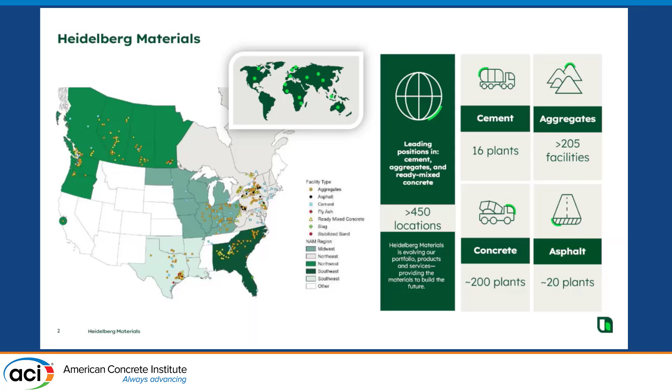And like a lot of companies out there, we have published a series of sustainability commitments. And we've grouped those into a number of different key categories. Having a safe and inclusive workspace, being nature positive with actions around biodiversity and returning some of our aggregate quarries to community assets in the future, looking at circular economy and resiliency principles, recycling concrete aggregate, looking at use of waste materials from the steel industry for slag, coal industry for fly ash, etc. And then the big one for us is net zero and actions to reduce our carbon footprint.

And because of our net zero commitments, we've published what we call our concrete promises, some of which are highlighted here on the screen, which were revealed about a year and a half ago at our Capital Markets Day. And some of the key ones that I generally highlight is that 50% of our revenue will be sustainable revenue by 2030. And sustainable revenue for us means meeting certain criteria in terms of how low carbon it is, how much recycled concrete material is being incorporated.

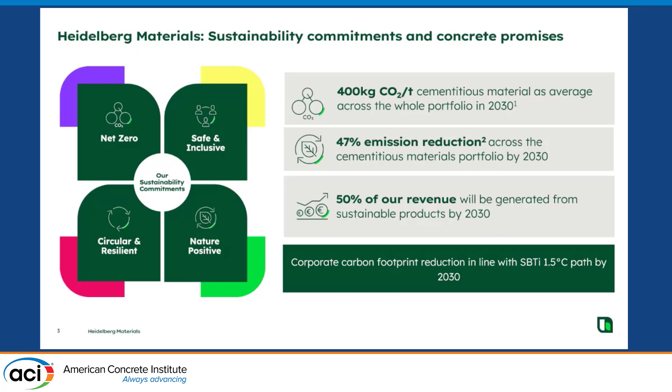And then the other one is that top number, which is we commit to reducing our carbon intensity of cement to 400 kilograms of CO2 per ton. So many of you are probably familiar with the old rule of thumb that 1 ton of cement equals 1 ton of carbon. We're trying to get down to 400. And for some context, the lowest EPD that we have for a straight cement product in North America is at our Delta, British Columbia cement facility, where we're at 679 kilograms of CO2 per ton. So quite a ways to go to get to that 400. That is a global number, so some countries are going to be pulling a little bit heavier than others, but nevertheless, we have a ways to go to get there.

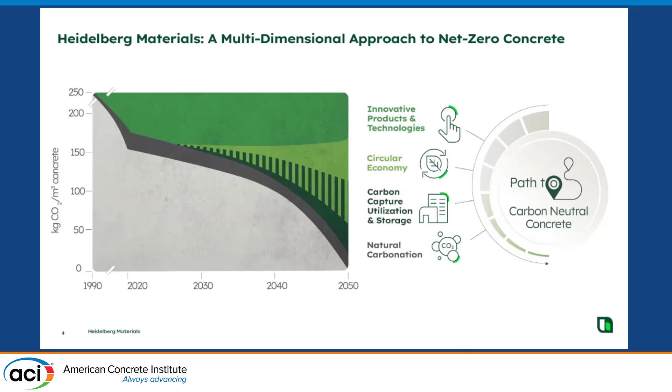And Rob Cooney is going to be going over a little bit of what the industry's action plan is to get to the goal of net zero concrete. And we're aligned with that as a member of the Cement Association of Canada. But we also have our own roadmap that's very similar, but we group it slightly differently in terms of where we're focusing our attention to help drive down to that goal of net zero. Those 4 buckets are innovative products and technologies, the circular economy, carbon capture utilization and storage, which I'm going to be focusing most of the talk on here today, and then the concept of natural carbonation. And many of these solutions are available today.

On the innovative products and technology side of the equation, we have Portland limestone cements. We brand them as EcoCem in North America. We also have blended cement products. Our EcoCem Plus product is a PLC with 20% fly ash already blended in it, coming right from the cement plant. Those are contributing relatively significantly to reducing the emissions associated with the cement product.

We're also utilizing alternative lower carbon fuels. So across Canada, cement facilities have started to implement alternative fuel programs where they're allowed to use construction demolition waste, wood waste, non-recyclable plastics, other waste streams, depending on the region. And this has a pretty significant impact on the carbon intensity of cement as well. Our British Columbia plant is already utilizing 20 to 30% substitution of these materials, and our goal is to get to 50% substitution across all of our plants in North America.

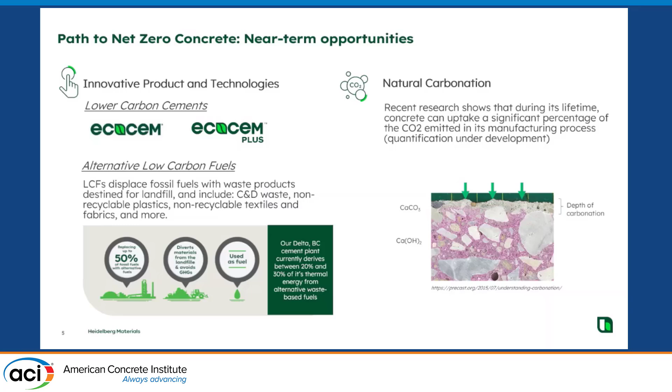And then the other one that's happening now is natural carbonation, and I think it was a subject on a number of the different talks going on here today at ACI. I'm not going to get into the nitty-gritty here because it can be controversial about what it exactly means, but there are efforts underway to better quantify in a conservative manner what the impact of natural carbonation is, and we'll start to see that reflected better on our LCAs and our EPDs at some point in the future.

And that brings us to the final product, concrete. And today there are a lot of different levers that are available for low carbon concrete. And again, it's been covered pretty well here at ACI with the various sessions that are going on. But ultimately we have a number of different levers at our disposal as concrete producers to demonstrate carbon reductions. Whether it's looking at our aggregate gradations and getting better particle packing and strength out of the skeleton of our concrete mixes, looking at different admixture products to help with water reduction and strength enhancing properties.

The big one, of course, is SCMs. Everyone's very familiar with the use of fly ash or slag to reduce the amount of cement that's going into the mixes. Cement types like Portland limestone cement. Days to strength maturity is a big lever for us, being able to extend a mix from 28 days to 56 days to 91 days. Those are tremendous levers for significantly reducing the carbon impact of concrete.

And there are some new digital solutions as well, like maturity monitoring technology or in-truck monitors or probes that sit in the drum of the truck and create different feedback loops for how that concrete's performing, so that based on the given climate temperatures of the day or the actual mix that's going out the door, you can get that feedback loop and make incremental improvements to your concrete mix as you optimize towards carbon reductions.

And right now, you can pretty comfortably deliver about 30 to 50% carbon reductions using an EPD when compared against the regional industry average benchmarks, if there are no limitations in place. If you just had a slab that you're going to pour that nobody's ever going to stand on, you could pour a very low carbon concrete slab.

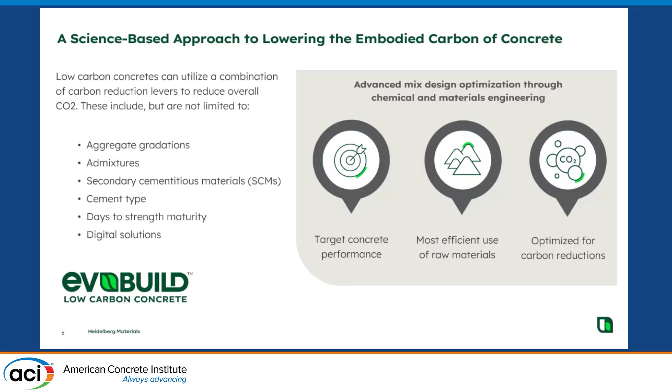Unfortunately, when we get into construction, there are lots of limitations that get put in place, whether it's workability, pumpability, finishability, or schedule. You need higher strength concretes to make your suspended slabs when you're doing high-rise construction, and that does not fall in line with our carbon reduction efforts. So there's a lot more to be done to be able to deliver the deep carbon reductions that we're all chasing as an industry. And we have to look to the future to be able to deliver those carbon reductions.

And where Heidelberg Materials is concerned, where we're really making significant investments in trying to demonstrate a leadership position, is in the future with carbon capture, utilization, and storage technologies. So another one of our concrete promises that we've put out to the marketplace is that we hope to capture 10 megatons of carbon cumulatively by the year 2030. And we're going to do that by constructing a number of CCUS plants or CCS plants without the utilization component.

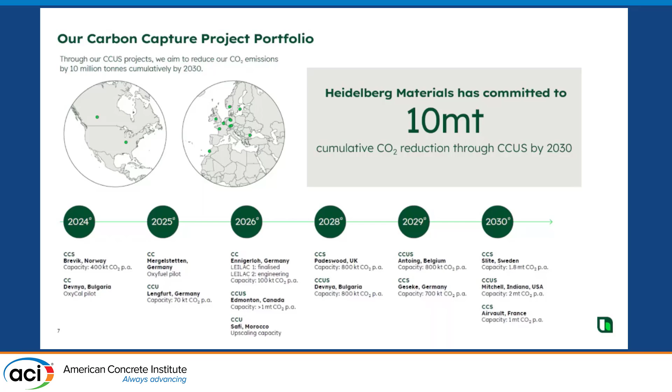There's a number that are highlighted on the screen. Many of them are located in Europe, in Germany, the UK, France. The first one that's going to go online later this year, within the next month or so, is in Brevik, Norway. So we're very excited about that in the near term. And then longer term, we have a couple of solutions or plants that we're targeting to have in North America as well. One in Edmonton, Alberta, which I'm going to focus on a little more deeply in subsequent slides, and then another one down the line in the 2030 time frame for Mitchell, Indiana.

And that brings me to our Edmonton project that's been publicly announced, and we're working hard at getting it over the finish line to be able to break ground on construction. This project is going to capture 1 megaton of carbon annually once it's fully online. Ideally, it's going to be completed by 2029. There are two main barriers to being able to go forward with CCUS. One of them is cost. It takes a tremendous amount of cost to be able to build one of these facilities. What we quoted when this plant was first announced was $1.4 billion in 2023.

And as we know, costs have only gone down since 2023, so we're going to be able to go forward with this hopefully soon. But kidding aside, there's a lot of uncertainty out there right now, but we do have funding secured with the federal government, with the provincial government. It's something that we're hoping to make our final investment decision on in the near future, and then be able to break ground and deliver this solution to North America.

One of the questions we get all the time is, why Edmonton? Why would you put a carbon capture plant in Edmonton? And from a market demand perspective, it doesn't make a lot of sense. We'd probably prefer to put it out on the west coast in the Pacific Northwest or in British Columbia, where there's a higher demand for green products.

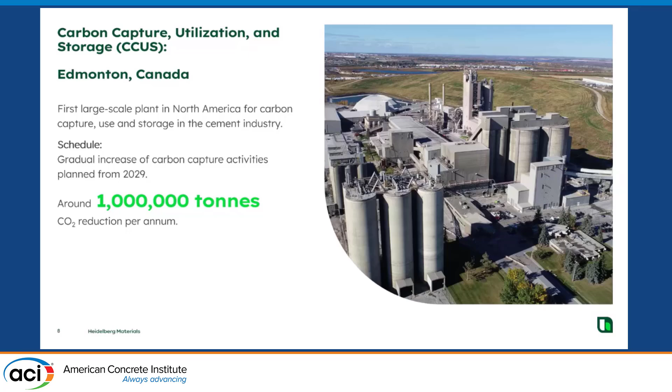But the other limiting factor when it comes to CCS is that you need storage. Storage needs to be available in your local geology, and Edmonton and Alberta more broadly is ideally situated in that regard, as there are a number of what we call natural geologic storage hubs, many kilometers underground, that are able to accept the carbon that's going to be captured, not only from this project, but other projects throughout Alberta and Saskatchewan.

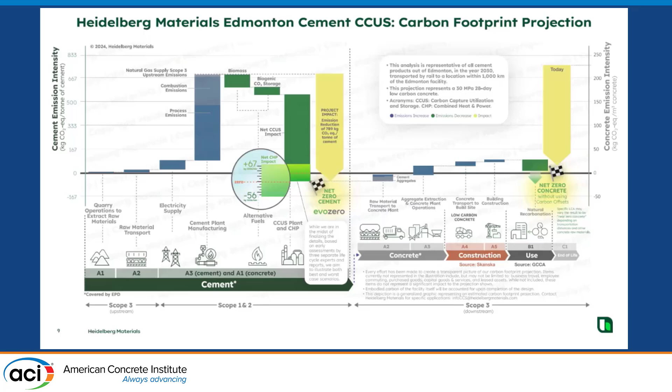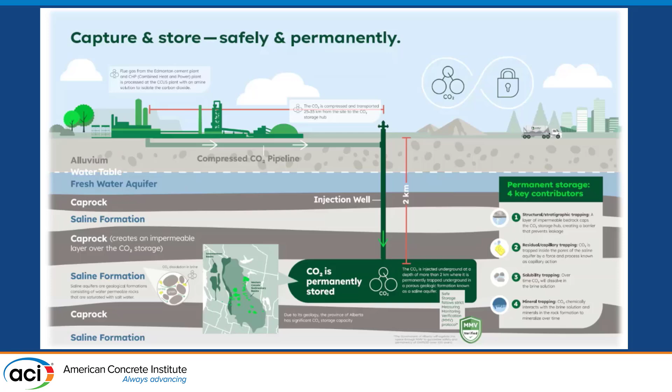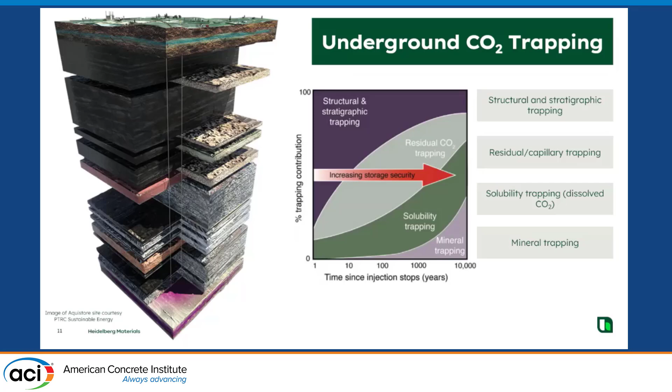And then over longer periods of time, we're going to have solubility trapping as that CO2 chemically interacts with the saline. And then over a much, much longer time frame, it's going to actually remineralize in place and revert back to limestone. So it is a very permanent and safe solution ultimately. And here's another view that demonstrates a little more visually what those layers of geology look like as you go 2 kilometers down, and a little more detail on what the time scale is going to look like for when that permanency is being achieved towards that goal of mineral trapping long term.

So when we look at low carbon concrete today, there are a number of challenges that we face. I alluded earlier to schedule. Schedule is probably the biggest driver right now that limits our ability to demonstrate really deep carbon reductions using the traditional levers that we have today. That's something that just can't be addressed using the solutions that are currently available.

And as we've seen with things like Portland limestone cement and other novel SCMs being introduced into the marketplace, there's a lot of reticence in the design community and the regulating community to accept these solutions as they come. It's been a 15, 16-year battle with Portland limestone cement, and the solutions are coming much faster than they can be evaluated. The benefit of this carbon capture solution is that it's a post-production process and doesn't alter the chemistry of the cement at all. It's exactly as it is today, and you're avoiding all these challenges that we're currently experiencing with low carbon concrete.

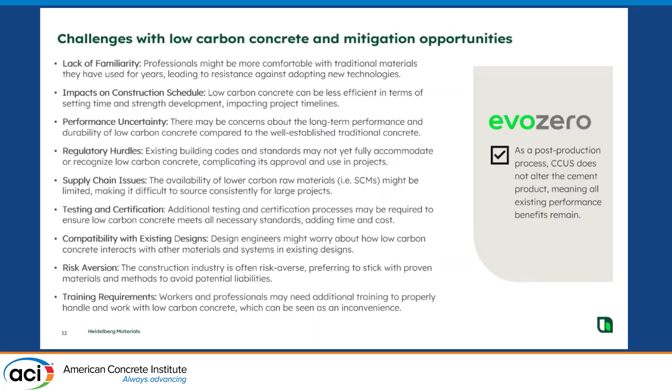So again, something that we're very excited about and hoping to introduce as early as 2029. And with that, I'm very happy to take any questions you may have.